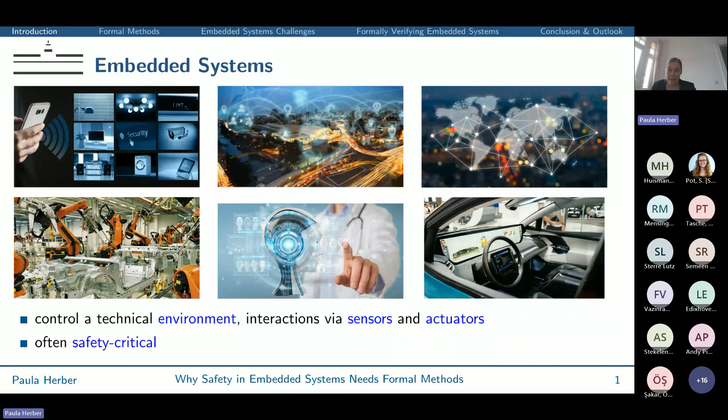However, in practice, even such safety critical systems often fail. So, for example, in 2015, the US Aviation Authority reported on a software bug in the Boeing 787, which was actually an integer overflow in one of the generator control units, which led to a complete shutdown of the whole generator unit every 248 days without a system restart.

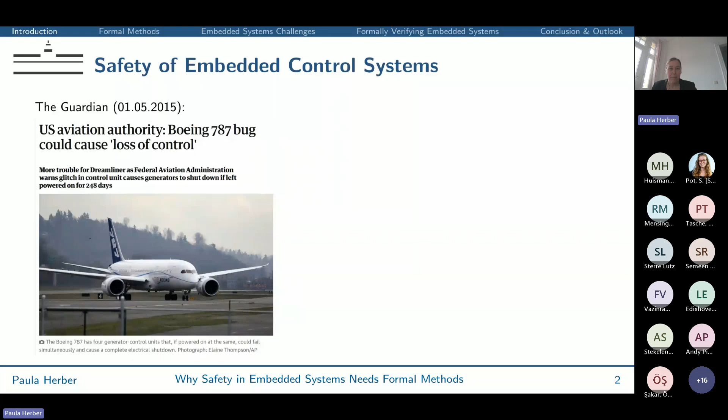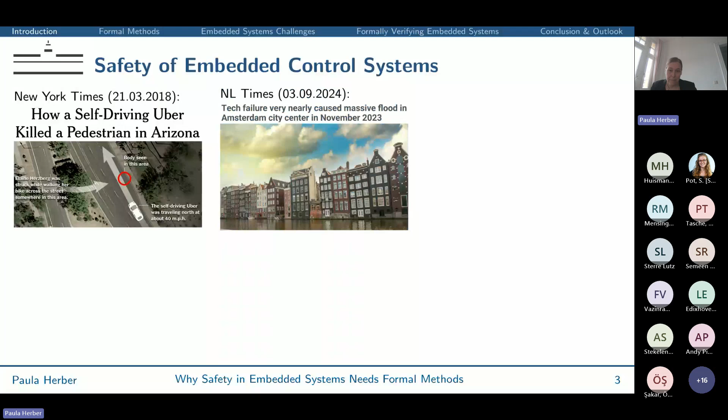Fortunately, that bug was detected before anything bad happened, but there are also cases where failures of the control software can have really severe consequences, as for the Tesla bug in 2018, for example, or as tragically illustrated by the death of a pedestrian caused by a software fault of a self-driving Uber, the near flooding of Amsterdam in 2023, or most recently by Waymo having problems with self-driving vehicles hitting into road barriers. So these things happen, although the responsible companies and manufacturers of course have serious quality assurance in place, and the systems are extensively simulated and tested.

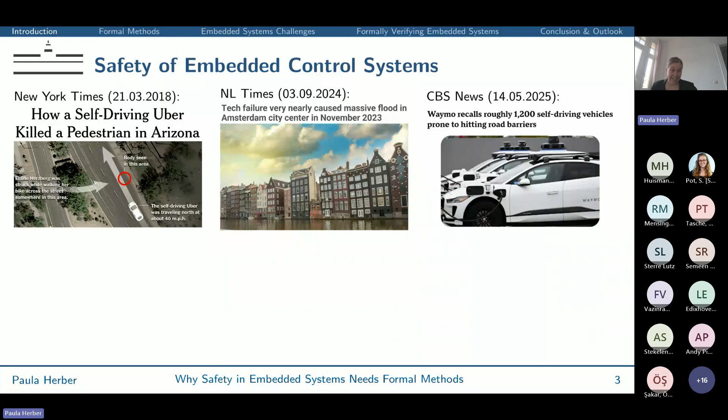So Edsger W. Dijkstra, probably the most famous Dutch computer scientist, already said in 1972 that testing can be used to show the presence of bugs, but never their absence. And this is due to the problem that with testing, one always considers only a selection of possible inputs and possible executions, but we do not get any information about untested scenarios, so it is inherently incomplete.

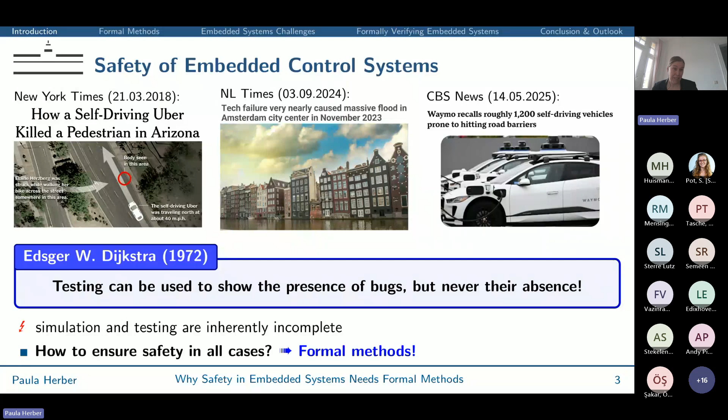So the question is, how can we ensure safety in all cases? And the potential answer to this is, of course, to use formal methods. And in the remainder of this talk, I will first explain how formal methods achieve safety in all cases for those of you who are not that familiar with formal methods.

And for this, I will briefly walk through the key ideas of two famous examples of formal methods, namely model checking and deductive verification. And while this should give you an idea what formal methods can do, I will then also talk about the challenges we meet when we try to use formal methods for embedded systems.

And then in the last part of my talk, I will show a few examples from the research of my group, my collaboration partners, and me, what we have done to address these challenges and to increase the applicability of formal methods for embedded systems. In particular, I will show some work we have done to integrate formal methods into the design process, an approach to integrate ideas from deductive verification and model checking to meet the scalability challenge.

And finally, if time allows, I will also briefly show an approach we have developed to enable the safe integration of learning components into the formal verification process. And then I will conclude my talk and give an outlook on open research problems and future work. So let me start with an introduction to the key ideas of formal methods.

So the goal of formal methods is to provide an unambiguous specification of the system and desired properties, also called requirements, and to prove that the system behaves exactly as intended under all possible conditions. The general approach to achieve this with formal methods is to use formal modeling techniques, that is, modeling techniques with mathematically precisely defined semantics. Examples for such modeling techniques are Kripke structures, automata models, and formal logics, with which a system and its requirements can be precisely and unambiguously described.

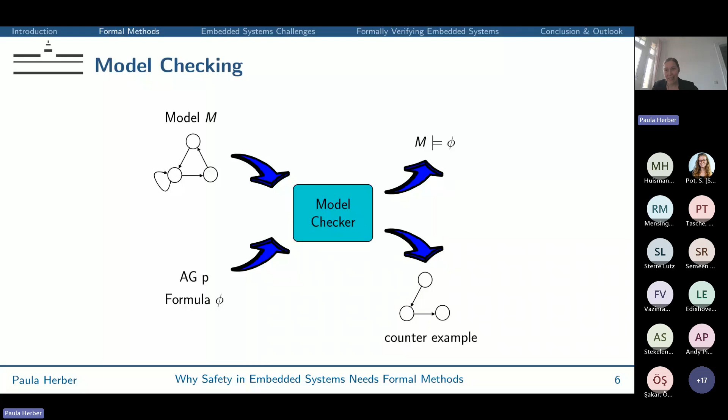And for this, we look at the underlying formalism that is typically used to describe the system under verification for model checking. And this is a Kripke structure. So a Kripke structure is a tuple (S, T, S0, L), where S is a set of states, T is a transition relation that connects source and target states, S0 is a set of initial states, and L is a labeling function that assigns atomic propositions to each state. That is, L tells us which atomic propositions hold in a given state S.

As an example for this, you can imagine a simple controller of the traffic lights at a train crossing. The traffic lights are initially red, and whenever a train comes, the controller switches the smaller train light from red to green. And if no train is coming, the controller switches the traffic light for cars first to red, yellow, and after some timeout to green. It stays green until a train is approaching again. And if this happens, the traffic light for the cars is switched first to yellow and then again to red.

So to formalize the traffic light controller as a Kripke structure, the circles are interpreted as states and the arrows as transitions between these states. Thus, the set of states is simply S1 to S5, and the set of transitions between these states corresponds to a set of pairs of source and target states for each arrow. And the initial state is S1. And the atomic propositions in this example can be used to capture the current color of the traffic lights, for example, that both the car and the train light are red in S1.

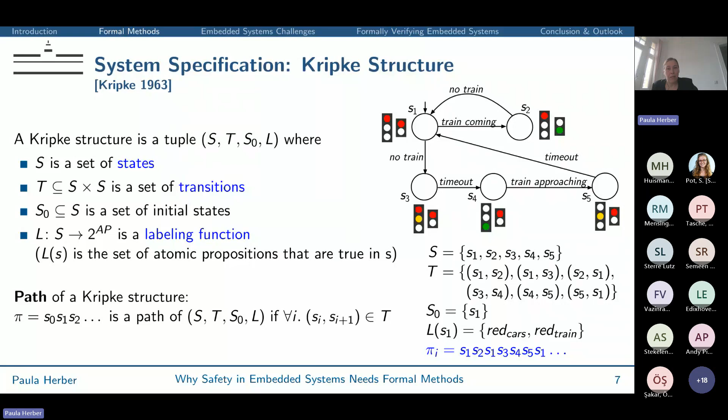To specify the intended behavior, that is the requirements, model checking based approaches typically use temporal logics. Temporal logics are logics that express temporal properties over paths and states using path quantifiers such as on all paths or there exists a path, together with temporal operators such as in the next state, until, globally, or in some future state.

An example of a temporal logic is the computation tree logic CTL, which provides the usual Boolean operators and combinations of path quantifiers and temporal operators to define properties over paths and states. Such as on all paths in the next state phi holds, there exists a path where in the next state phi holds, on all paths phi holds until psi holds, and so forth.

In our example of the traffic light controller, we would like to express properties such as on all paths globally, that is, in each state along each path, the traffic light of the cars and the train light should not be green at the same time. This is a classical safety property, which expresses that something bad should never happen.

And we can also express reachability properties in CTL. For example, that there should be at least one path where the traffic light of the cars become green somewhere in the future. And we can also express liveness properties. For example, that whenever a train is coming, the traffic light for the trains should eventually become green on all paths.

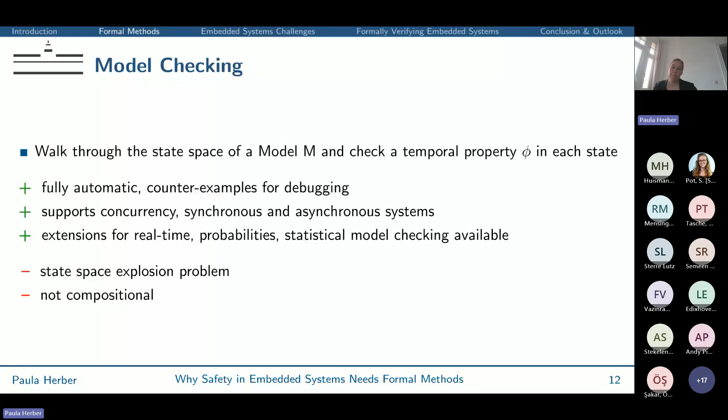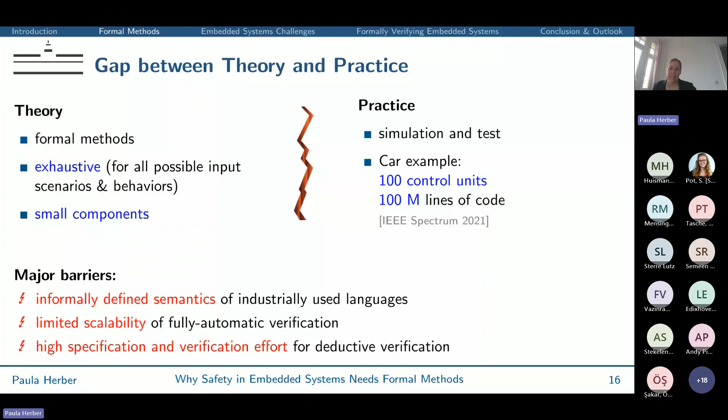So these barriers prevent formal methods from being applied in industrial design processes in general, and they are especially pronounced in embedded systems, because embedded systems come with some particular challenges for the application of formal methods. And these challenges are mainly imposed by their heterogeneity and their complexity.

So for embedded systems, a diverse variety of heterogeneous models and languages is typically used, for example, because they consist of deeply intertwined hardware and software, because they combine discrete control with a continuous environment, synchronous with asynchronous parts, and so forth. And this means that a variety of models of computation are involved in embedded system design.

And to further complicate things, as I already mentioned, the semantics of the models and languages that are used are typically not formally well defined. With respect to the increasing complexity, first of all, embedded systems are already inherently pretty complex because they are concurrent, reactive, generally should not terminate, and control a technical environment that evolves in real time.

And in addition, in recent years, the complexity of embedded systems is further increasing, not only because we have started to connect a huge number of devices, but also because the environments of embedded systems are getting more complex and more dynamic when we go from a classical temperature control system or a factory robot with one particular purpose to self-driving cars or smart manufacturing systems.

Yeah, and to cope with the heterogeneity and complexity of embedded systems, model-based development has become more and more widespread during the last 2 decades. And in particular, for embedded systems, so-called system design languages are often used. That is, languages that support multiple models of computation and enable analysis and simulation during the whole development process with executable system models. And in the area of embedded systems, 2 widely used system design languages are SystemC for the design of integrated hardware-software systems, and MATLAB Simulink for modeling and simulation of complex dynamic systems.

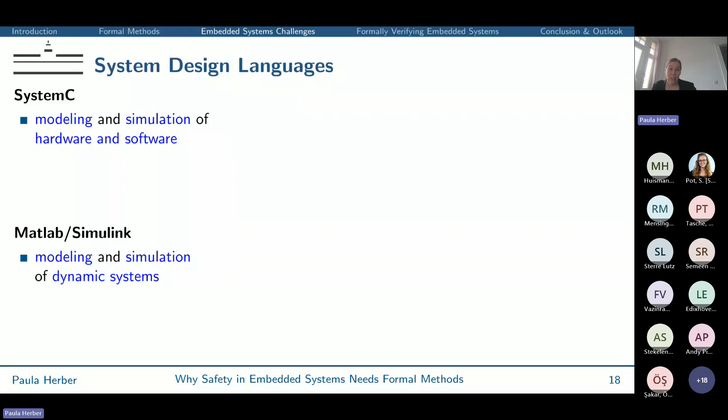And just to give you a quick impression of how this looks, for those who are not from this direction, the system design language SystemC basically extends C++ with constructs for the description of hardware, for example, with time, reactivity, and hardware data types, and with structural modeling constructs such as ports and channels.

And as an extension of C++, SystemC is a classical control flow-oriented language, and Simulink, on the other hand, is a data flow-oriented language, which basically extends classical block diagrams with means to model the differential equations of dynamic systems, for example, with integrators and complex mathematical functions of the underlying MATLAB library.

Both Simulink and SystemC are widely used in the industry and provide very good support for modeling and simulation of complex embedded systems. However, both have only informally defined semantics, and as a consequence, their correctness and reliability can be validated using simulation and testing, but not via formal verification.

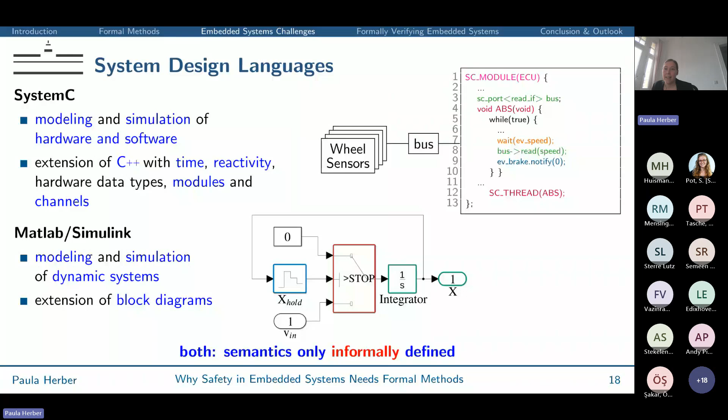Yeah, of course, open problems are also opportunities for research. And in our research, we have addressed this problem by developing techniques to formalize the semantics of industrially used design languages. So the question we have addressed in this part of our research is how to get from an informal description of the requirements and the system under verification to a formal verification process.

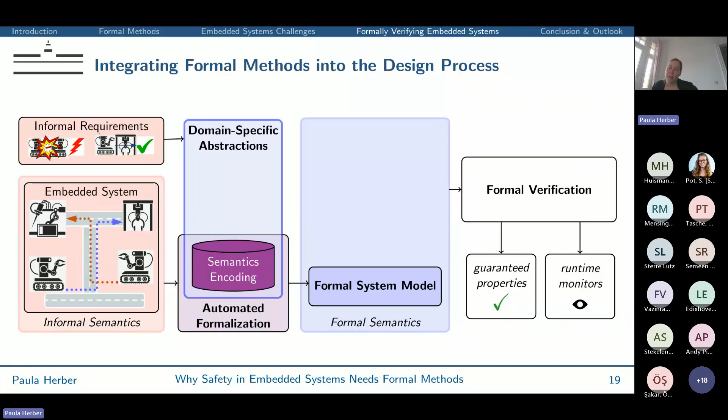And a key idea we exploit to overcome this problem in our research are what we call domain-specific abstractions. And the idea is that on the one hand, we can use domain-specific abstractions to define formal encodings of the semantics of informally defined languages to enable an automated formalization, that is, an automated transformation of informally defined system descriptions into a formal system model.

And on the other hand, we can also use domain-specific abstractions to define reusable specification mechanisms that help the designer to develop formal specifications that are needed for the verification, for example, assertions and invariants, but also safety, timing, and resilience properties or contracts for learning components. But let me get back to this later.

And first, let me briefly summarize what we have done to encode the semantics of industrially used design languages. We have done this for both SystemC and Simulink. And to formalize the semantics of SystemC, we have developed semantics encodings that enable automated formalization from SystemC into the input languages of several verification backends, namely into the UPPAAL model checker, which is especially well suited to verify timing properties and synchronization between processes,

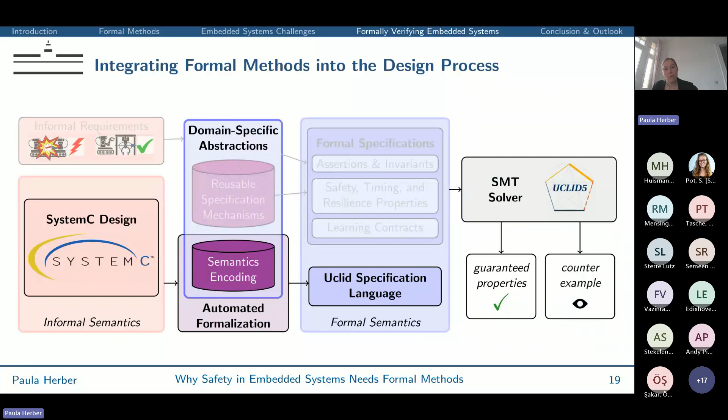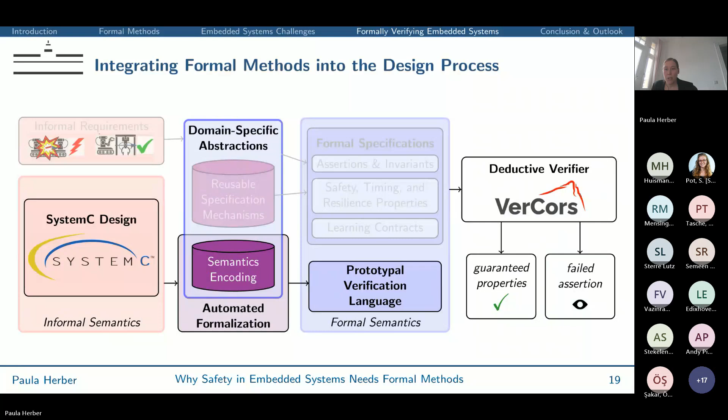into the input language of CPAchecker, a software model checker which enables configurable program analysis, the UCLID SMT solver, which is particularly well suited for bit-precise hardware verification, and most recently, the deductive verifier VerCors, which enables powerful mathematical reasoning. All of these verification tools can be used to verify properties for all possible input scenarios and for an unbounded time, and some of them, like VerCors and UCLID, even with unbounded parameters. Also, all of them give us some hints for debugging if the verification fails, for example, a counterexample or a failed assertion.

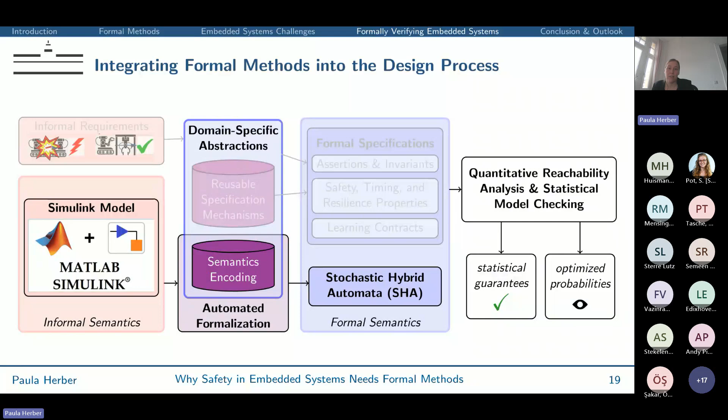To formalize the semantics of Simulink, we have developed a semantics encoding of Simulink's execution semantics, again in UCLID, which enables SMT solving, but of course only works for a discrete subset of Simulink, and into the differential dynamic logic, which enables interactive deductive reasoning also for hybrid systems using the theorem prover KeYmaera X. And more recently, we have also developed an encoding with stochastic hybrid automata, which enables quantitative reachability analysis and statistical model checking in the presence of uncertainty using tools such as the Modest toolset or RealySt.

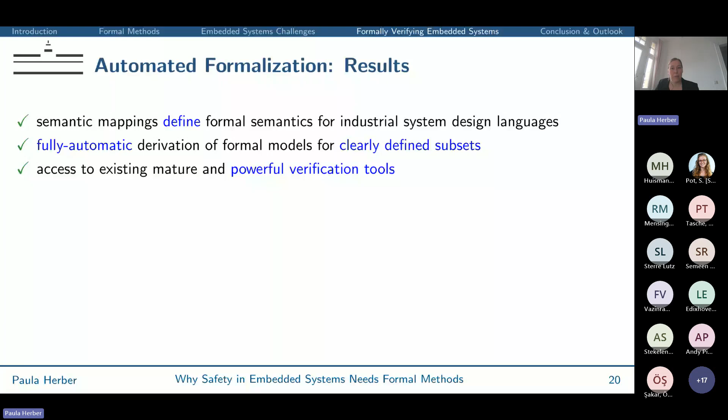The main advantage of all these works is that our semantic mappings define formal semantics for the considered industrial design languages and enable a fully automatic formalization. Of course, the formal languages we use do not have the full expressiveness of SystemC or Simulink. So they only support a clearly defined subset. However, if a given design is within the supported subset, we get access to existing mature and powerful verification tools.

We have successfully verified a number of case studies using our automated formalization, for example, an anti-slip regulation and anti-lock braking system, a universal asynchronous receiver transmitter provided to us by MetaMorph, a model of ARM's advanced high-performance bus provided by Carbon Design Systems, a generic infusion pump taken from the OpenGIP project, and a multi-object distance warner provided to us by partners from the automotive industry.

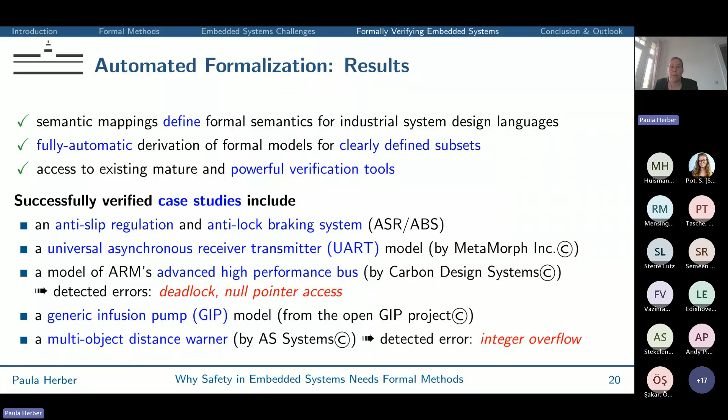What is interesting to note is that in two case studies which have been provided to us by industrial partners and which have undergone extensive simulation and testing procedures already, we still detected serious bugs like a deadlock, a null pointer access, and an integer overflow. So these were errors that only occur in rare corner cases, of course, and thus are very hard to detect by simulation and testing alone. But these are serious bugs in the sense that the whole system will fail if these rare situations occur. I think this demonstrates that formal methods can really help to prevent such bugs before the systems are put into operation.

But still, the scalability of such verification techniques is an issue, of course, due to the state space explosion problem of model checking and the manual effort necessary for deductive verification. One approach we have developed to partially overcome this problem is an approach that combines the strengths of deductive verification and model checking. We have originally developed this approach for SystemC, but have recently also applied it to software that runs on top of a real-time operating system.

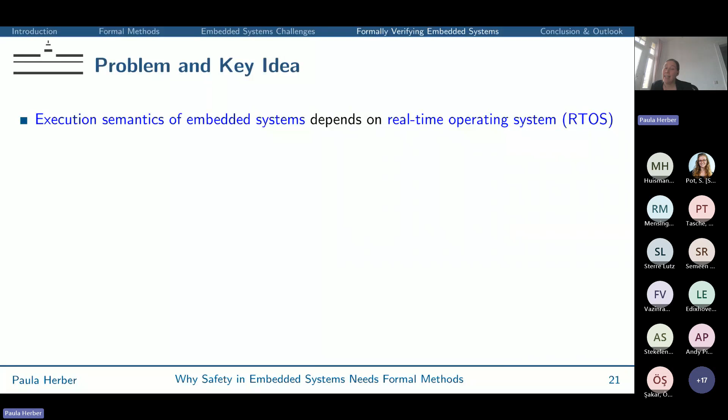And in this work, the main idea was to address the problem that the execution semantics of embedded systems crucially depends on the underlying real-time operating system, or short RTOS. Program verification frameworks typically abstract from the RTOS completely, and model checking based approaches that address the execution of RTOS-based software have the problem that they do not scale well with increasing state or data spaces, in particular, if process interleavings and dependencies are taken into account, and approaches based on deductive verification, on the other hand, have the potential to scale better due to the mathematical reasoning power and modular verification approach, but impose a very high manual effort to define the necessary assertions and invariants.

So the key idea of our approach here is to use an integrated approach where we complement a deductive verification approach with a so-called reachable abstract states invariant, which is automatically computed using a model checking style abstract interpretation. And the foundation of this work is, again, an automated formalization.

We have developed a semantics encoding of a particular real-time operating system, namely the industrially widely used FreeRTOS, which enables us to automatically transform FreeRTOS applications into the prototypal verification language, which is an input language of the deductive verifier VerCors. And VerCors then enables deductive reasoning about concurrent software, but of course requires invariants and assertions which need to be manually defined.

And to reduce the manual specification effort, we have developed reusable specification mechanisms that ease the definition of both local and global properties, and in particular enable the automatic generation of a reachable abstract states invariant, which we call the RASI.

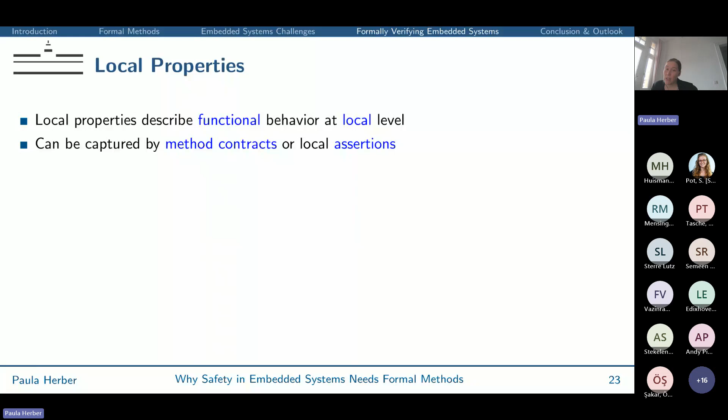So local properties are properties that describe functional behavior at a local level by solely using local information. So these are properties that can be captured naturally using method contracts or local assertions. And an example for this is the correct choice of speed in an adaptive cruise control system locally when the distance to the lead car and the target speed are already locally available to a process.

In this example here, we decrease the speed whenever we are getting close to the lead car, or if we are driving faster than the target speed, and we increase speed whenever the distance to the lead car is big enough and we have not yet reached the target speed. Such local properties can very efficiently be verified using the modular reasoning techniques of VerCors.

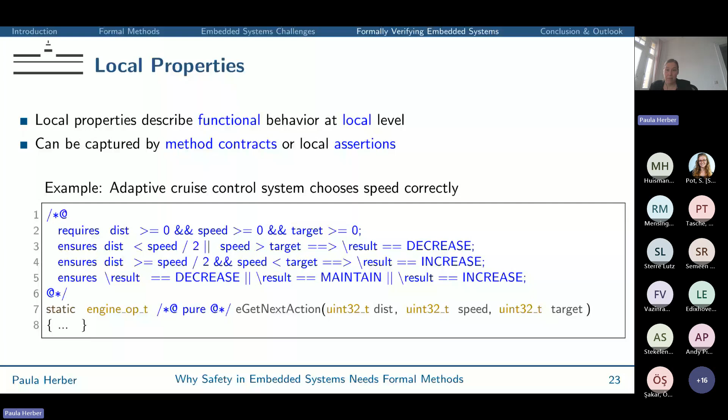However, while such local properties solely depend on the local information within one task, global properties are properties that depend on task interactions and events. So they cannot be defined solely within one task, but require information from other tasks. So for example, if we want to ensure that the main control unit of an adaptive cruise control system always reacts to sensor inputs within a given time limit, we need to start a timer within the sensor task whenever new data is received, and then check the timer within the main control unit.

While local properties can be verified very efficiently with VerCors, such global properties are much more challenging because they require global invariants about the relation between tasks and events. A simple example of such a global invariant is deadlock freedom, where we specify that we do not get into a state where all tasks are waiting for an event, but no event is scheduled anymore.

This is an example of a global invariant, but it does not provide us with the necessary information we need to verify timing properties or other global properties that depend on the order of execution and timing of tasks. So to define the necessary global invariants for this can actually be quite challenging because we need the information that the control task is actually always executed whenever new sensor data is available, for example. And this information is not locally available.

So to address this problem and to ease the verification of such global properties, we have introduced the concept of the reachable abstract states invariant, or short RASI. And the basic intuition here is that we capture reachable states in a global invariant, but capture only task and event states and abstract from data completely. With that, we can restrict the verification to the reachable abstract state space and make the information about task interdependencies and interactions locally available.

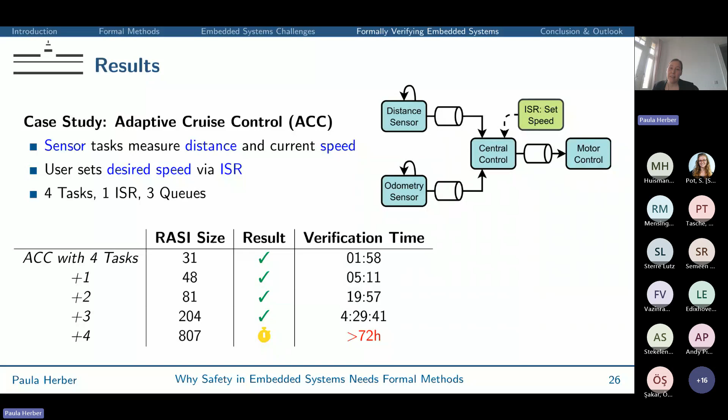And as you can see here, the verification was successful, but you can also see the scalability issue. If we just add a few dummy tasks, so +1, +2 is just adding dummy tasks that actually have no functional behavior, but just increase the number of possible task interleavings. And you can see that the verification is still successful with up to 3 additional tasks, but does not terminate within 72 hours with 4 additional tasks, indicating a state space explosion problem.

However, on the plus side, the manual specification effort was only 1 or 2 hours, which is a great reduction compared to other works that use deductive verification. And we achieved this reduction by integrating the strengths of a model checking style abstract interpretation into a deductive verification process. And I think this idea has quite some potential.

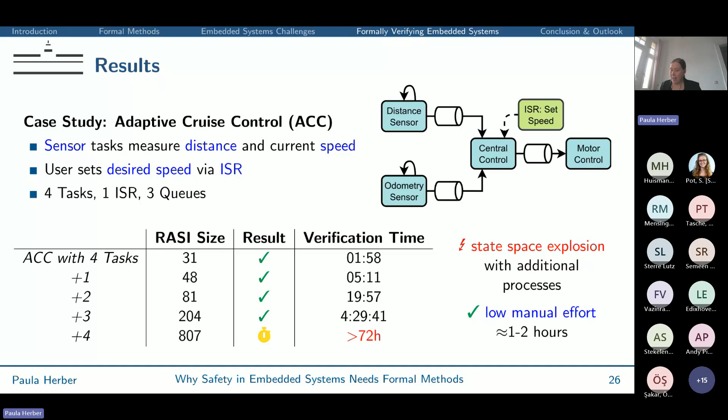Okay, I've already talked for a while, so I will go over the last part of my talk very quickly and only sketch the key ideas of our approach for the safe integration of learning components. So this work builds on existing automated formalizations of Simulink with the differential dynamic logic. And to safely integrate learning components into Simulink models, we have developed an approach where the safe actions of reinforcement learning agents are described by a contract. And I will illustrate this real quick with a small example and then wrap this talk up.

So in this example, a factory robot uses reinforcement learning to reach dynamically assigned workstations while it has to avoid moving obstacles, which we also call opponents, A and B. And the main safety requirement in this case study is that the robot should not crash with the opponents. So the distance between the robot and both opponents should always be greater than some predefined safety threshold.

I do not have the time to explain the details of the Simulink model of this, but the interesting point is that for the verification of the Simulink model, we can replace the RL agent from the Simulink model by a contract that defines safe actions. And the contract basically just says that under the assumption that we have a non-negative sample time and that the opponent is not driving backward, the RL agent either stops, which we always consider to be safe, or if it drives with a positive velocity, then the distance to the opponent minus the maximal movement of both the RL robot and the opponent within one sample time towards each other is still greater than the predefined safety distance.

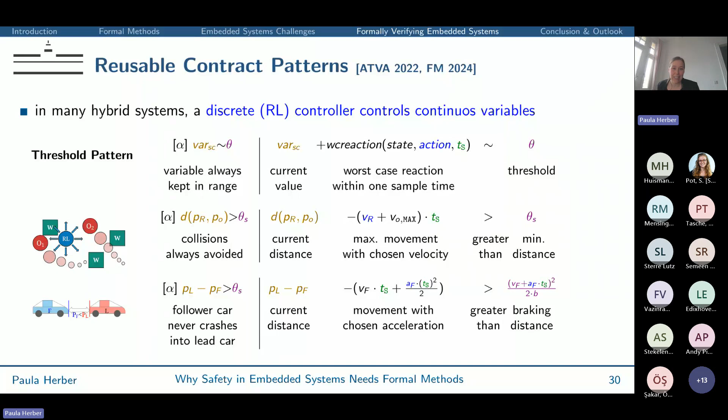To reduce the necessary manual effort for this, we have also proposed reusable contract patterns, which basically exploit that systems where an RL controller controls continuous variables always look very similar, but I will skip this in the interest of time, and I only will mention that we have verified quite some case studies from the Simulink RL library using our approach, including an intelligent temperature control system, an intelligent water tank, our factory robot, an adaptive cruise control system, and an intelligent distributed water control system where the pumps are subject to stochastic failure.

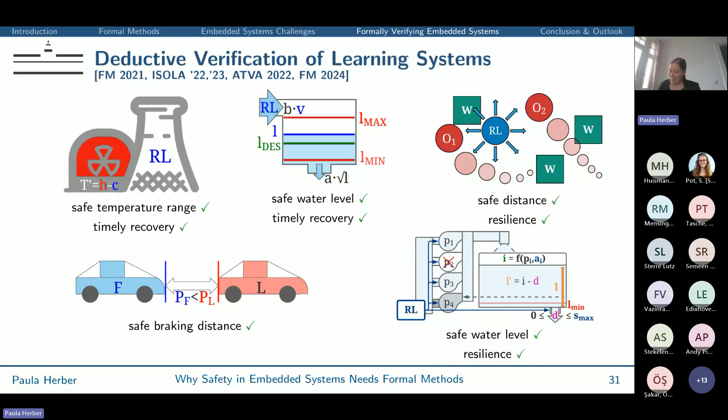Yeah, so let me conclude this talk.

I hope I have persuaded you today, if you were not already persuaded before, that embedded systems need formal methods, or at least that their safety and dependability can significantly benefit from formal methods. However, the application of formal methods to embedded systems is challenging, in particular due to the heterogeneity, the informally defined semantics of industrially used languages, and due to the complexity that is inherent to embedded systems due to their concurrency, reactivity, and real-time dependency.

So research is needed to overcome these challenges, and I hope I have shown you some impressions from our own work on this, in particular that semantics encodings can enable the automated formalization of industrial design languages and give access to existing verification tools, and that reusable specification mechanisms can help to increase scalability and to reduce the manual verification effort. This is not the end of this, of course.

There are several open challenges and open research questions. One is that the automated formalizations only support subsets of the industrially used design languages, so not all the programming features industrial designers typically use are covered. Furthermore, more work is needed on increasing the usability and scalability of formal methods for embedded systems. And another challenge, which has gained very much interest by the industry in recent years, is to go beyond qualitative safety properties and to also address quantitative aspects.